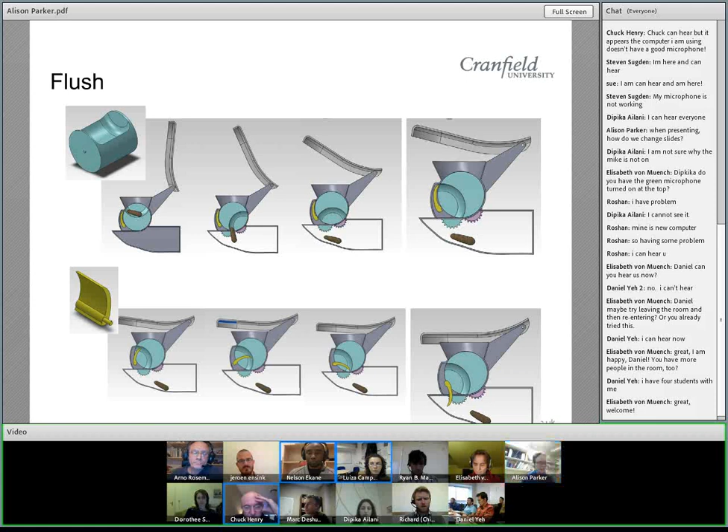We found it was absolutely critical that there was a flush mechanism that worked, that was desirable for users, going to separate them from their waste, both visually and by smell. As illustrated here, when you lift the lid, there's a bowl that's presented. This can take both feces and urine. As the lid closes, the bowl rotates, and then it's scraped clean. In this way we can flush that waste, and with no water at all, we achieve that visual and smell separation.

Next slide. The water is condensed on two bead columns. We're experimenting with different materials for the beads and different coatings. What you see here are glass, the blue-coloured ones, and the red-coloured ones are silica. The water is condensed onto these beads and then can drain out, and that water is clean enough, because there are no pollutants in it, that it can be used around the house for washing or irrigation. Actually, it's clean enough that it could be drunk, but there may be some taboos around that, so that's not encouraged.

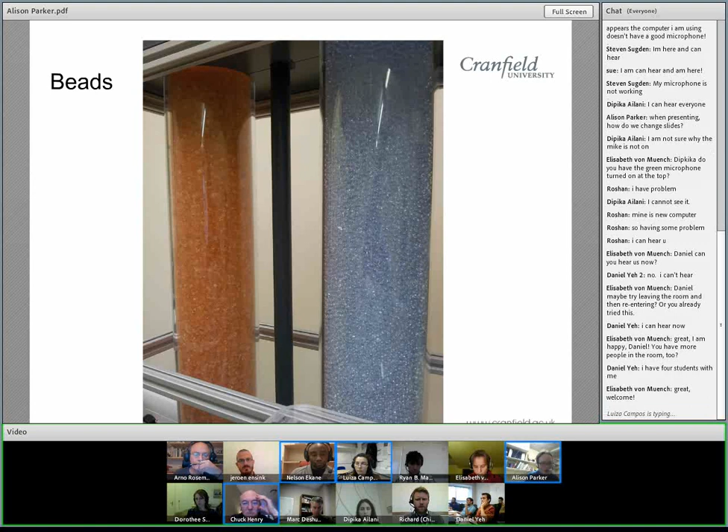Next slide, please. This is all the components together in what we're calling our works-like prototype. This prototype illustrates how the components will be configured together.

As you can see, it's made of perspex. The final design is not made of perspex, because we appreciate that not everyone shares our fascination for looking at how our waste is processed. So it will be an opaque and quite attractive design, but this shows the components together.

In the front center, you can see the chamber with the membranes in, and the flush will sit on top of that. That's the one component.

As you can see, at the moment we're near the end of the cycle, so most of the liquid has been extracted, and you can see the liquid in the container at the bottom. The solid is just settling at the bottom of the chamber now, and is being moved out of that chamber using a screw press, which extracts the last of the liquid from the waste.

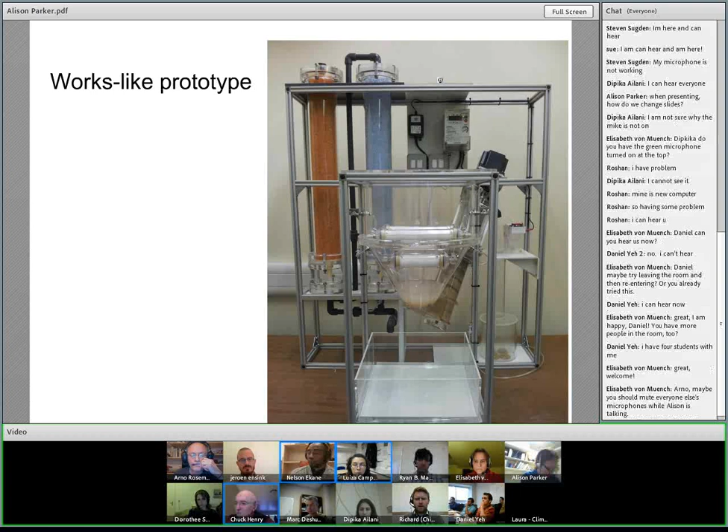The power for the toilet will be supplied using human power. So we've been developing various bicycle and hand cranks. There's only a minimal amount of power needed for the toilet, simply for the sweep gas for the membranes, the Nano Mister, and for the screw press.

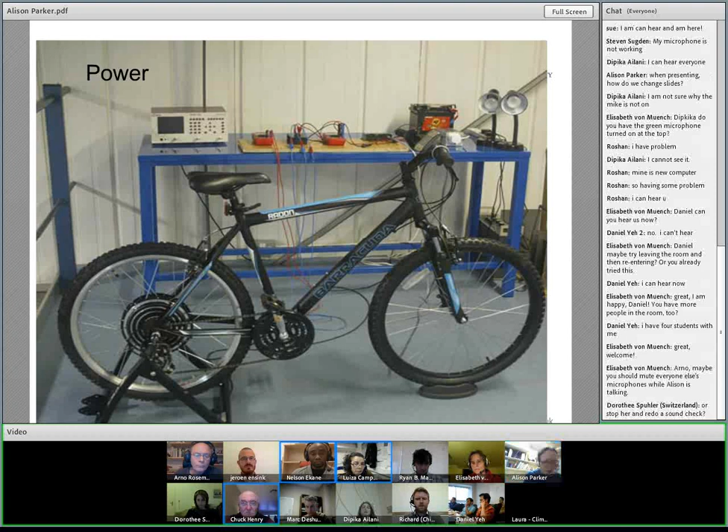It can be supplied by mains quite easily, but obviously we're looking at scenarios where mains electricity might not be available, so this bicycle generator could provide the energy for the toilet, and any excess energy generated could be used for charging mobile phones, running a TV, or any other use around the home.

Next slide, please. The phase that is still really the biggest area we still need to work on is extracting energy from the solid. So there are various other grantees who are working on options.

We would plan that the solid waste would be taken from our toilet once a week, away to be processed for the energy extraction.

We're looking at working potentially with Janicki, who are developing one option for composting. We're also looking at Unilever, shown in the photo bottom right, who are working with a company called DPS Limited, who have a pyrolysis unit, which you can see photographed.

We've also seen some examples of very small-scale gasifiers, which would work on maybe just 40 households' waste to extract that energy.

The type of business model we're proposing is that users would pay a fee to have this waste extracted and taken away from their houses once a week. They would pay a fee for this service.

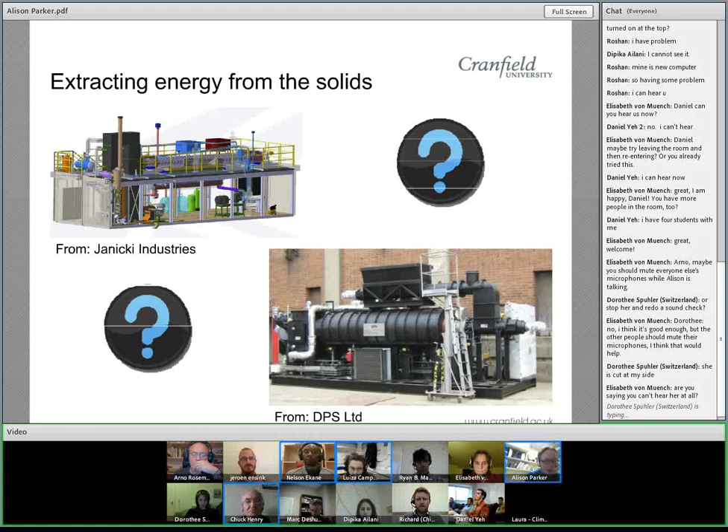The service would also have a monthly maintenance cycle, which will be required, and also a partial rental fee for the toilet. So under contract, they won't pay a large upfront cost, but will pay a small amount every week.

Next slide, please. So obviously, this is not something I'm working on alone. We have a large team here at Cranfield working on the design, the engineering, the nanotechnology, and the waste treatment aspects of the project. You're very welcome to go and look at our website, which is listed there.

We have a blog as well with plenty of photos and videos, especially at the moment as we're very much in a building phase. There's lots of new equipment coming in, and you can see videos of that working.

Thank you very much, Alison, for that brilliant presentation of a very high-tech system, at the same time very practical, the use of the bicycle, manually powered system.

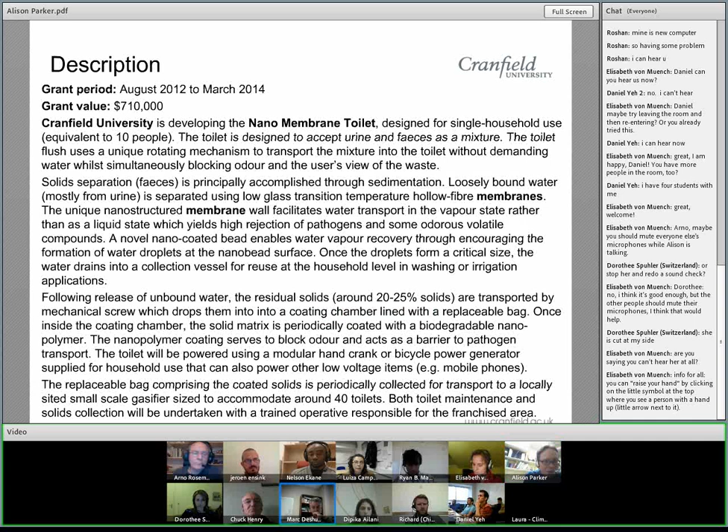Okay Luiza, to answer your first question, the water that passes through the membrane is essentially pure water. The only thing we think might pass through might be some volatile organics. The beads, because the water is a vapor, their role is to condense the water rather than to do any purification. If there's ammonia, for example, passed through as a volatile organic, that will be absorbed at that point. But there will certainly be no pathogens. Does that answer the first part of your question?

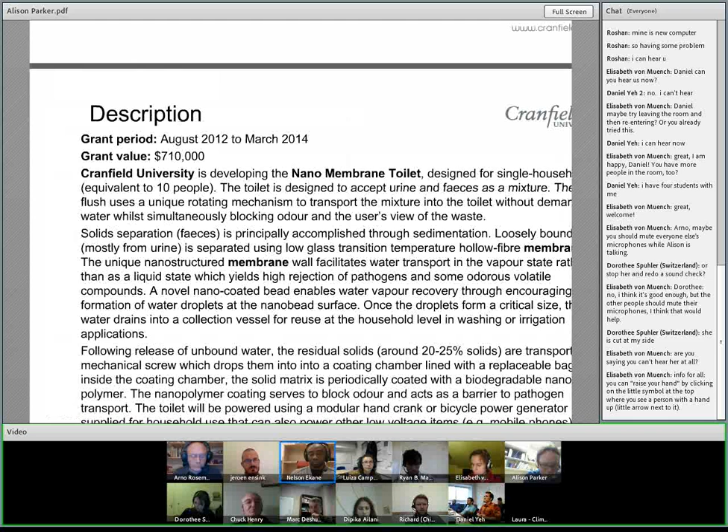Luiza, are you satisfied with that answer? Yes, that answered the first part.

Okay great, there was also a question of the cost. On the costs, like all the other grantees, we're aiming for less than 5 cents per user per day. We do think this is possible, although it does look like a very high-tech system, it's using components that are essentially off-the-shelf. The membranes are off-the-shelf components, not something we've developed especially for this toilet. So we think we can get the overall cost to manufacture the toilet down pretty low, and with the energy generation we should be able to offset some of those costs as well. We haven't got the financial modelling done completely because we're still really only just pinning down exactly how the technologies will work, but we're confident we can get below that 5 cents per day target.

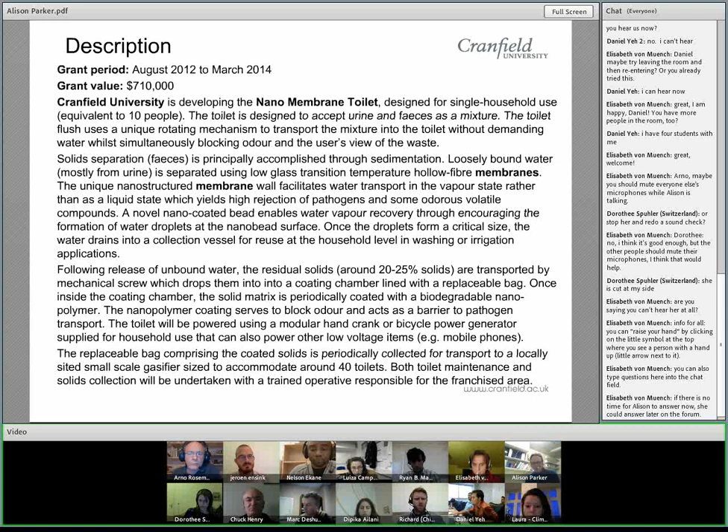But before that, I have just a question. You said they're free - did you do some tests, microbial tests? If you did, could you share those values with us? And also the nutrient content of the sludge - did you do any tests of the NPK, for example?

Sorry, what was the first question? What you said was free? Yeah, you said it was pathogen free. Did you test? Because we haven't tested on real feces yet, no. But because the pathogens won't be able to fit through the membrane, because there's no holes in the membrane - essentially it's a dense membrane. We don't expect any pathogens through, but obviously we need to back that up with tests once we're working with real feces.

And your second question, I've forgotten. Your last part of your question? Yeah, the other part of the question was on the nutrient contents of the sludge, the NPK. Did you do any tests on that yet?

No, because we're anticipating that we're basically going to thermally process the sludge, so we are going to lose those nutrients. But we think that that's a more cost-effective mechanism than potential fertilizer reuse. Energy is extremely valuable, whereas reusing fertilizer in urban areas has proved challenging. So of course I'm keen to hear examples of where it's working well, but we think that the thermal processing energy is going to be the...

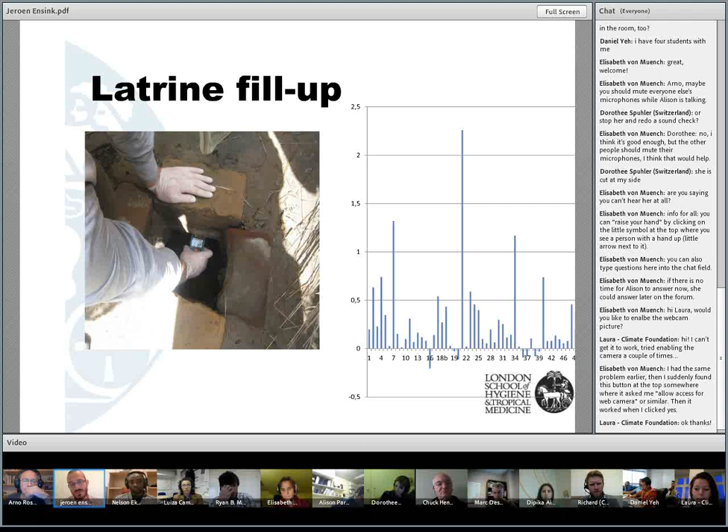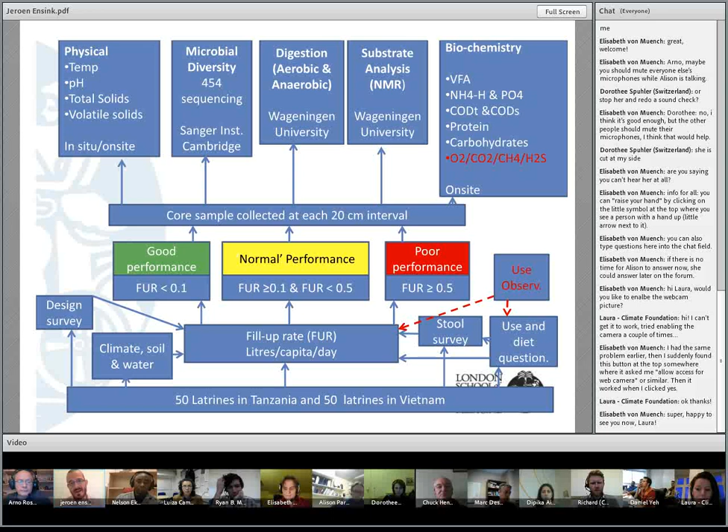Next slide please. When we looked at those 50 latrines in Tanzania and Vietnam, we could classify them based on their fill-up rate, the FUR. If the fill-up rate was less than 0.1 liter per person, we considered this a good performing latrine. The yellow ones with a fill-up rate between 0.1 and 0.5 were normal performing latrines. And then we had the poor performing latrines that have more than 0.5 liters per person per day. So this is how we classified latrines.

At the end of those 2-year periods, we took a core sample through every pit latrine, and that material was analyzed for a variety of different physical characteristics. It went to the Sanger Institute to do a full analysis of all microbiota available in that pit latrine, whether alive or dead. We did detailed digestion analysis at Wageningen University, and we looked at the bottom of the latrine to see what kind of material was still there, using NMR analysis and solid state analysis, which should give an idea of what remains.

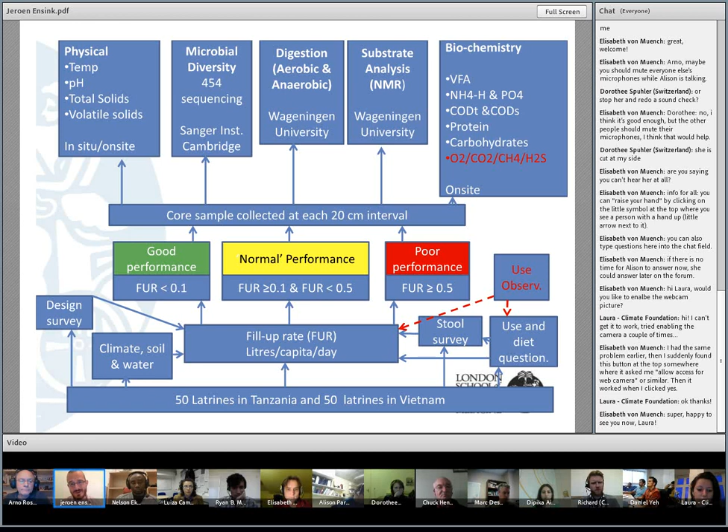Can I get the next slide? I'll quickly run you through some of the findings, and I'm aware that this is not the most clear slide.

I think the story is more interesting than the slide itself. When we looked at the latrines, we came to the conclusion that roughly 60% of all COD available in a pit latrine does not react at all. It's basically inert, it stays in the pit, it doesn't react.

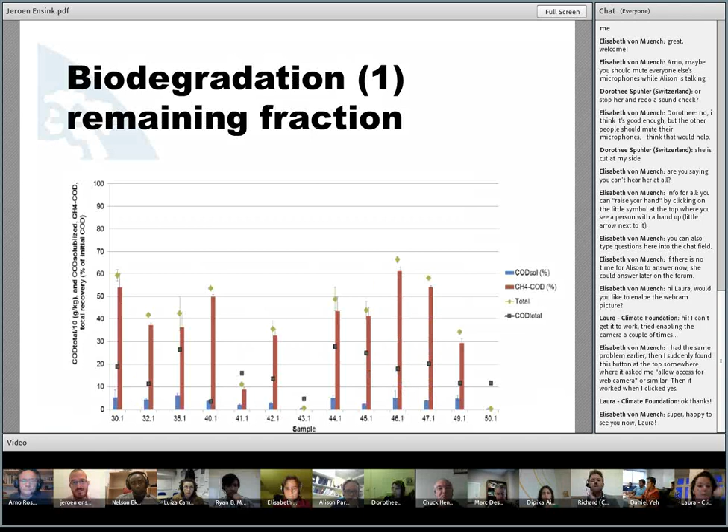That's the first conclusion. Next slide, please. Could I get the next slide? Oh sorry, yeah, this one.

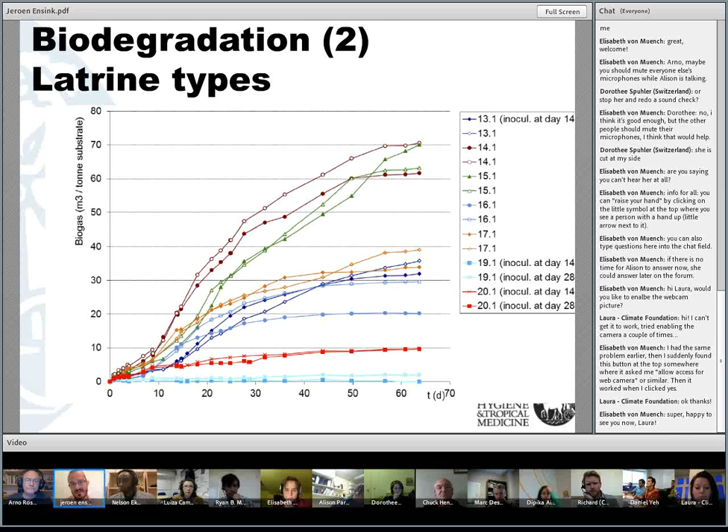The other observation from the biodegradation work was that if we look at the 50 latrines we have, we can roughly classify them into 3 groups based on their biodegradation. We have a group of latrines, the green and brown lines at the top, that at the moment we set them up for biodegradation, automatically start producing biogas. Then we have a group of latrines, the middle ones from blue to orangey-brown, that initially do not produce any biogas.

But at the moment that we add an inoculum - in this case Dutch wastewater, since these tests were done by Wageningen University - the sample suddenly starts producing biogas, so it becomes biologically active. Then the bottom ones, the red and light blue lines, are a group of latrines that, irrespective of inoculum added, do not produce any biogas at all - there's basically no biological activity in the pits. I thought these were very interesting findings: latrines automatically producing gas, some latrines starting to produce biogas as an indication of biological activity after inoculum, and some latrines that simply don't do anything.

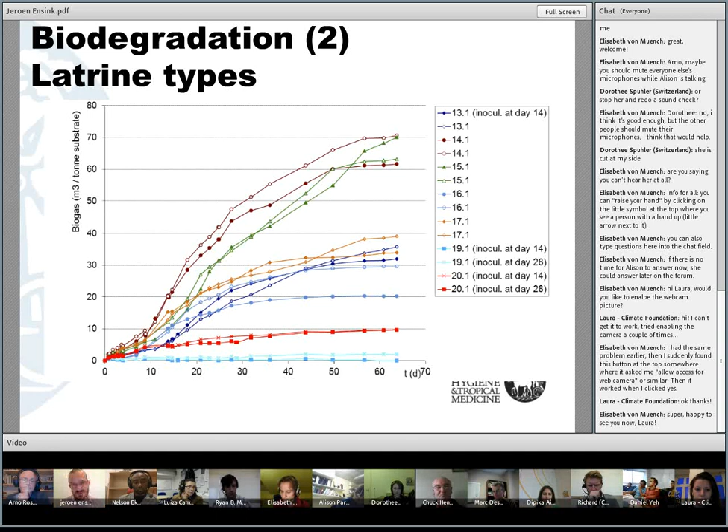Next slide please. This led us to the following assumptions.

There is a part of fecal matter which is very difficult to degrade and stays behind. When we look at the bottom samples in the latrine, from 1.5 meters to 2 meters deep, really at the bottom of the pit latrine, there is a lot of material left over. The NMR analysis seems to indicate that the material that doesn't get degraded is probably complex polysaccharides and lignin. We need to look into much more detail, but wet chemistry is expensive and time consuming, and we're still working on that.

But if we know what that material is at the bottom of the pit latrine - the material that doesn't degrade - then there is an opportunity to find enzymes or something else that could actually help break down that 60% of material that doesn't seem to degrade.

Environmental conditions are unsuitable in the pit latrine to keep key microbial communities alive. What we see in our data from the Sanger Institute is that we have very different microbiota in pit latrines that perform well compared to latrines that perform really poorly. We have identified groups or different families of bacteria associated with good performing latrines, opening up the potential - which I was initially a bit skeptical about - that we could come up with a bioadditive. In addition, we found latrines that are really low in moisture content, which could limit biological activity, and latrines that are really wet, which could also limit biological activity. pH and temperature are also key issues.

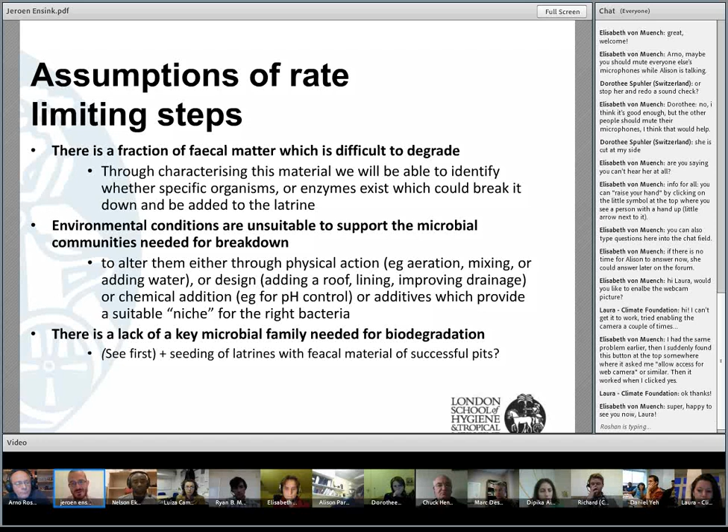And I think that's the broad story I wanted to tell you, and I'll end with a slide on who we are. We are a much larger grant, a mixture of academia - what I'm presenting today is just the fundamental research on pit latrines we've been doing, but we've also been developing business prototypes and testing them. If you want to know more, please go to the website and look at the different work streams we have. I'm in the process of updating the website, so there should be new information for you soon. And I assume I'll now stick to the 5 minutes.

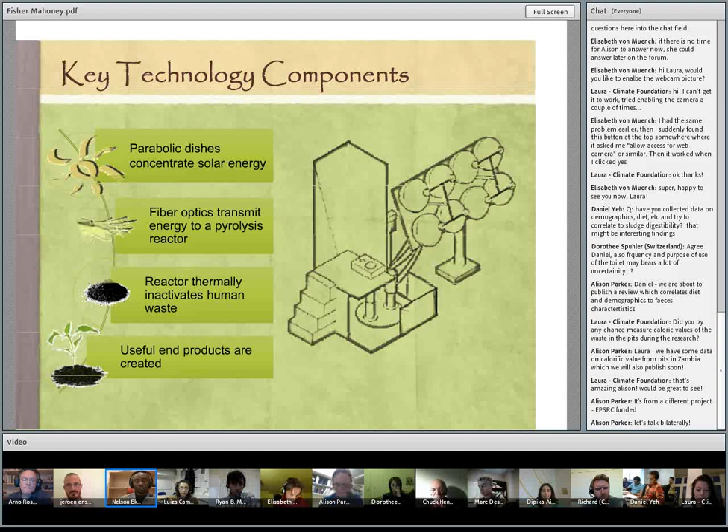The reactor is a cylindrical reactor that sits on a carousel. We have two reactors that, in one mode, act as a collection vessel underneath the toilet. Then it rotates around the carousel to the other side, and the fiber optics drop down over it to add heat to the reactor and stabilize the waste, producing a useful end product of biochar.

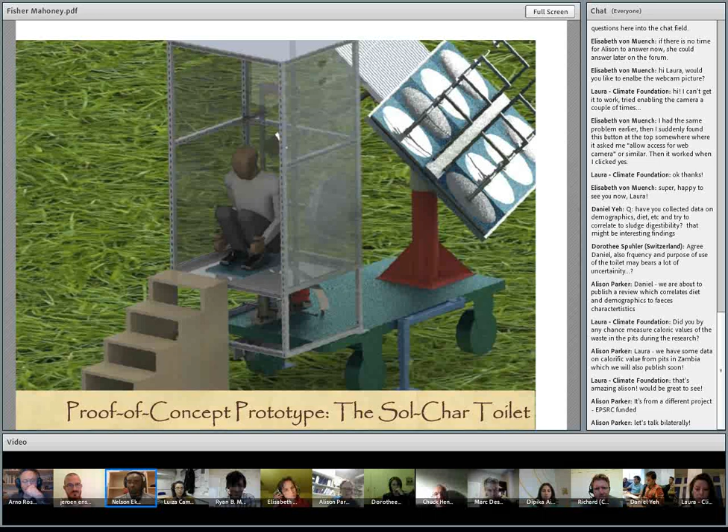Next slide. This is the artist rendering of our prototype. It's actually sitting out in the parking lot here at CU. It's a nice sunny day, so we're testing our reactor right now.

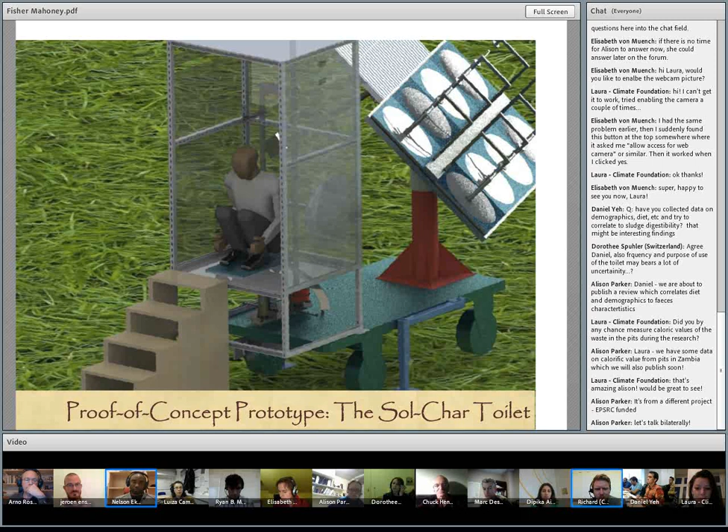You can see on the right side of the image the 8 parabolic dish solar concentrators; the fibers aren't shown since it makes the SolidWorks simulations a bit cumbersome. Similar to the drawing before, the reactors sit underneath the toilet, and we have it on a mobile cart that allows us to move the whole prototype wherever we'd like.

We'll actually be able to nail that number down after today. We're testing the fiber optics we're going to use in our prototype that will be sent to the fair, so if any of you are at the fair, you'll be able to see it in action soon. I'll turn it over to Ryan, who's going to finish up the presentation.

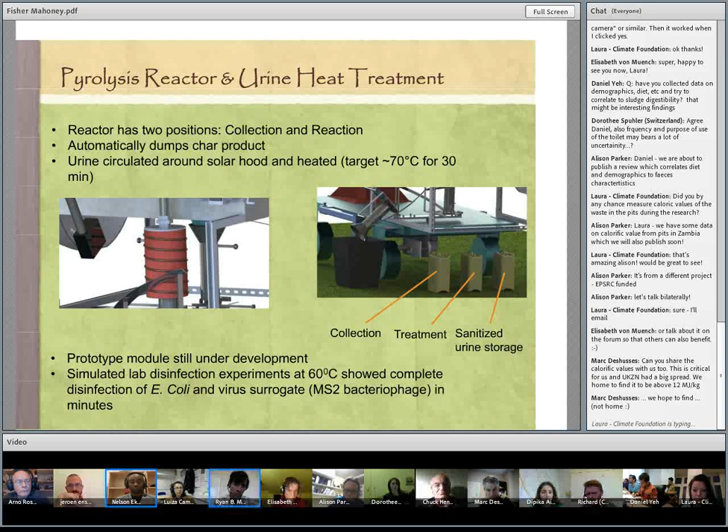This is a quick overview: we are using urine diversion, with the urine circulating around our reactor to take advantage of the waste heat. The urine is targeting 70 degrees Celsius for 30 minutes in order to disinfect it, and we have a dumping mechanism on our current prototype so it'll be easy for people to use.

Overall, we have a first generation prototype we're finalizing the construction of right now. We're mainly trying to prove the concept and make char out of human waste using concentrated solar power. It's designed to meet the needs of 2 kilograms of feces and 5 people per day, and 4 kilograms of urine, in 4 hours — only part of a solar day.

We're going to continue altering the system moving forward, for things like storage for cloudy days, and making it more efficient and economical as we move forward.

Right now, our end goal is to make a valuable product. The nice thing is that we're not using the intrinsic energy in the feces to run our processing — this is all off solar energy — so we're able to sell the energy intrinsic in the feces as a valuable product afterwards.

To that end, next slide: we're measuring different energy contents in the char we're producing. We've run experiments with real human waste from 300 degrees Celsius to 750 degrees Celsius. The lower temperature is shown to be competitive in the solid fuel market, even without being a traditional biochar or charcoal feedstock.

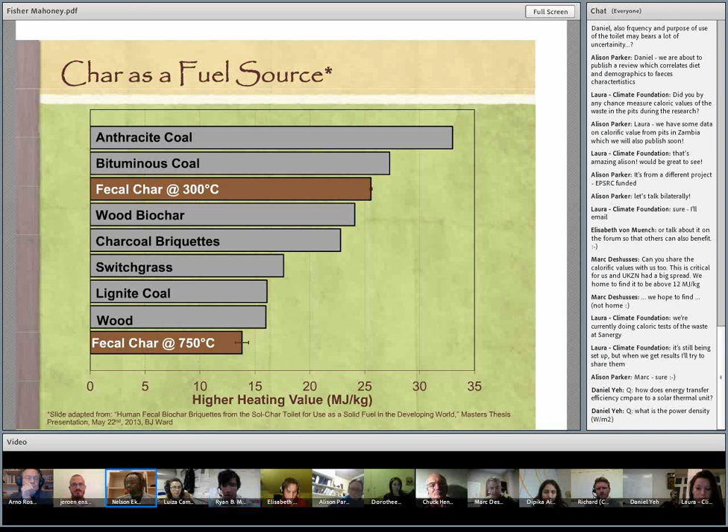Next slide. We're also evaluating it as a soil amendment and adsorbent. We've run experiments around the properties listed here, which tend to be important factors when making biochar as a soil amendment.

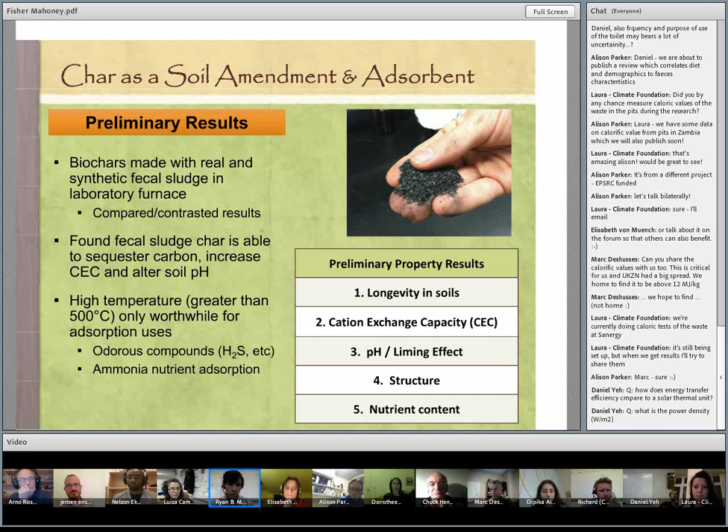We're also running experiments related to odor removal, hydrogen sulfide removal using biochar as an adsorbing media or filter media, as well as nutrient retention from a urine stream. We have some data but don't have time for that today, so next slide.

Overall, this is just an overview of some of the accomplishments we've had in the past year, spending time trying to improve solar tracking accuracy with cheap analog controls and managing the heat that we're generating.

Actually, one of the biggest problems we've had is generating too much energy and too much solar flux, which is a unique problem to have in these settings. We're also working with partners to evaluate markets for different products, from household scale to industrial solid fuel scale, as well as adsorbents and soil amendments. We've also completed experiments related to disinfection of urine.